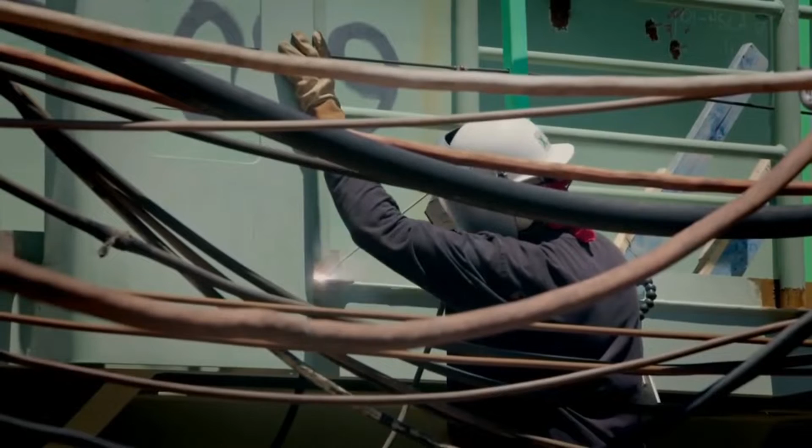In dry dock in Newport News, Virginia, Jeff Hummel and a team of engineers are building the second of this 10-strong fleet of carriers, the John F. Kennedy. We've been working on it for about 3 years. We got about another year and a half in the dry dock. And then after that, we'll spend about 2 years testing it before we deliver.

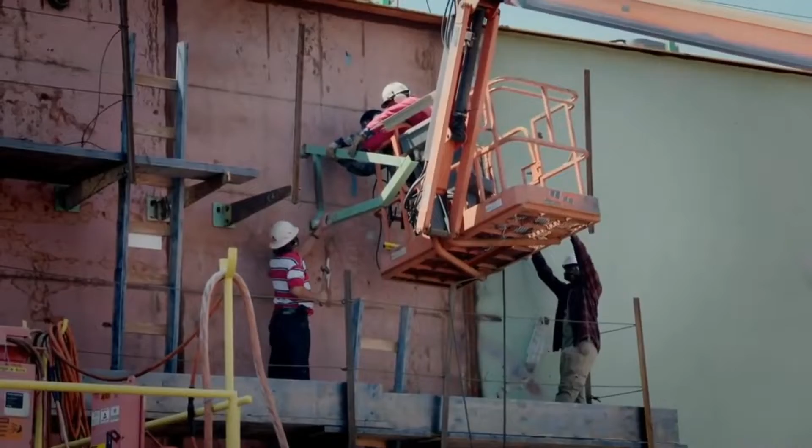Mike Butler heads up construction of these trailblazing ships. Well, an aircraft carrier has to satisfy two major roles. One is a humanitarian role, and one is a defensive or offensive military role. This ship does both and does it very well.

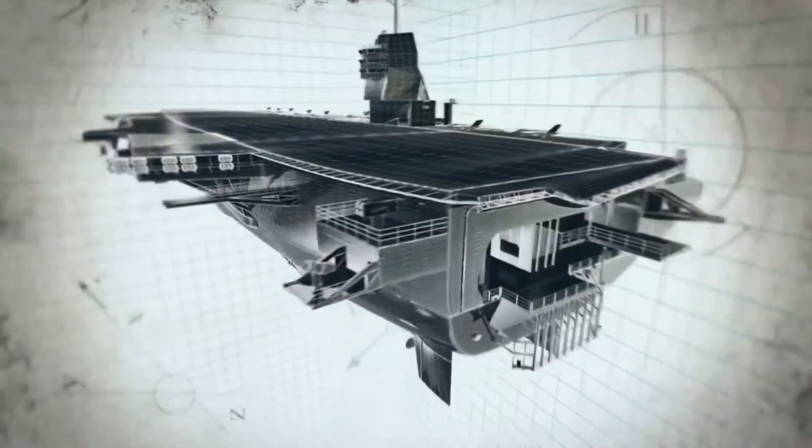The largest warship ever built, the Ford-class carrier is almost as long as the Empire State Building is tall. 35 aircraft are stored in a giant hangar. 3 supersized elevators deliver the planes to an 1,100-foot-long flight deck, equipped with an electromagnetic catapult system, capable of launching planes faster than ever before.

The amount of technology that's been infused into the ship is going to put the Navy in a position to fight the wars of the 21st century. It's going to be the most capable ship out there in the fleet.

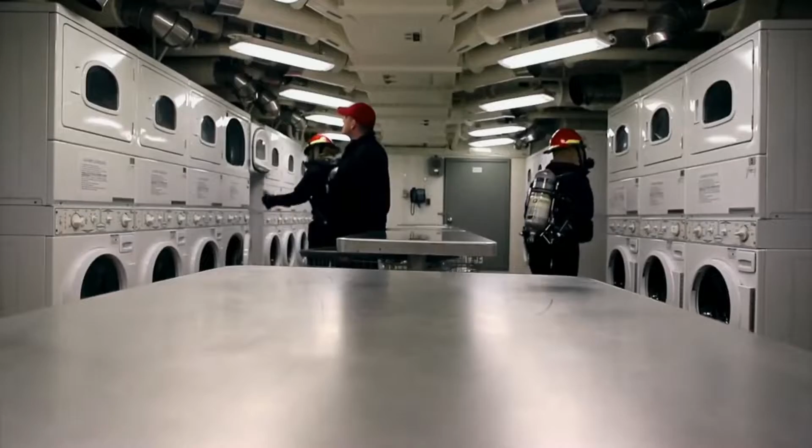But creating the world's largest mobile air base poses many challenges. How do you power a 110,000-ton vessel with 4,500 crew members? What we do is live everyday lives, so washing laundry, serving 20,000 meals a day, so it's like powering essentially a small city.

How is it possible to get jets airborne in just a fraction of a normal runway? The greatest challenge is to be able to get the aircraft to the speed that it needs in order to take off. And how can you bring them home safely? Landing on a carrier requires an external means of stopping the aircraft.

But the engineers face an even bigger problem. The Ford class holds more planes than any carrier before it. They must be able to launch and recover an astonishing 200 missions a day. So how do you achieve that on a ship?

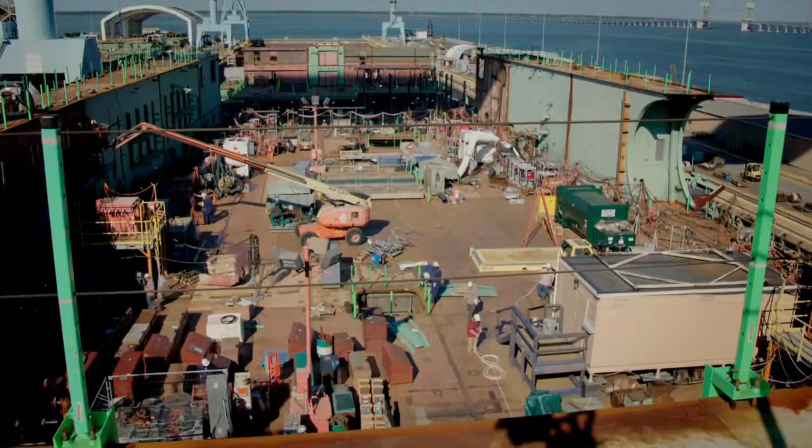Engineer Marco Estrada is facing that challenge. Typically, an aircraft carrier of the Ford class will hold approximately 78, 79 aircraft. The job of managing the flight deck is organized chaos. You have launches, you got recoveries, you got fueling, you got weapons at the same time. So it's a very challenging operation. To achieve their unprecedented mission rate, some aircraft must be able to land at the same time that others are taking off. It's an impossible problem that was faced by the innovators of the past.

U.S. Navy pilot Lieutenant Leslie Garcia is a fast jet specialist, well aware of the huge problems of launching and landing on an aircraft carrier. It is not uncommon to have over 20 aircraft launch right before 20 aircraft are recovering during the same open deck time.

To simulate the straight deck's limitations, Lieutenant Garcia is handing over the flying to a model plane club. So right now we're putting down the center line of the straight deck carrier.

The historic straight deck design is ready for takeoff, but how will it cope? They're going to go airborne, execute their mission, and then look to come in and land.

As the mission gathers pace, landing simultaneously is impossible. Now we've got the next cycle of pilots getting ready to take off, while the first cycle that we launched are still airborne and waiting for their opportunity to come land. So as you can see, they're basically fouling the whole flight deck. It's a very inefficient process.

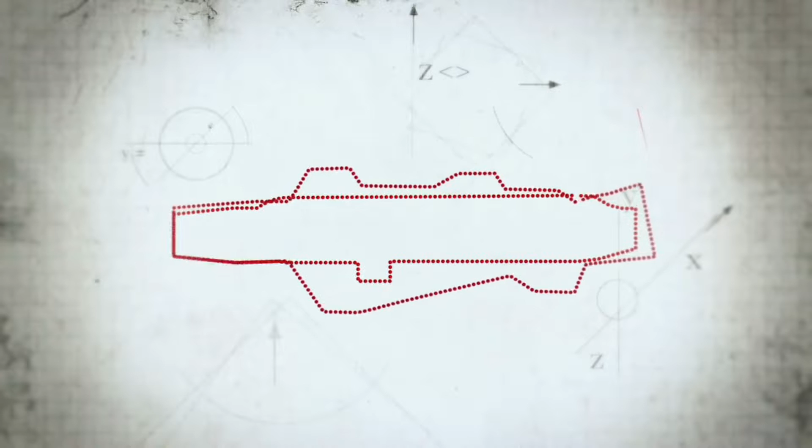It was the brainchild of British Royal Navy Captain Dennis Campbell and engineer Louis Boddington. They supplemented the traditional straight deck with a second runway. The plane's landing area was now separated at the ship's waist, while launch catapults were safely positioned at the front of the ship.

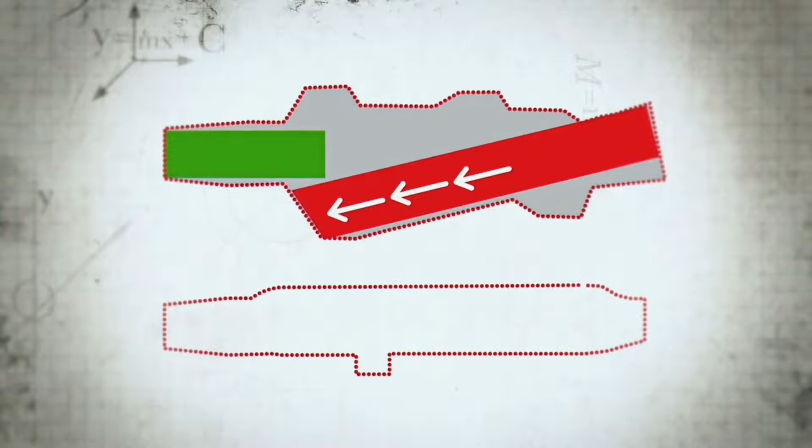When this was a straight deck, you would basically just see one landing area straight up and down the ship, with taxiing and launching aircraft towards the bow of the ship, landing aircraft towards the back. Really, the game was changed when we went over to the angled flight deck. It became so much more efficient and, more importantly, so much safer.

The Midway's remarkable refit allowed her planes to take off and land at the same time. The landing aircraft are going to be offset so that if they need to take back off, if they missed a wire, they will have the angled deck that is going to keep them away from the launching aircraft that are launching straight ahead.

So will adding an angled deck bring some order to today's mission? As you can see, we've got one taking off. He's going to come around and start executing touch and goes while we launch the other aircraft.

As on the Midway, Campbell and Boddington's addition transforms this airstrip into a well-oiled machine. He's approaching on his landing. Let's go ahead and launch the second. And you can see that those two flight paths are naturally deconflicted because of the angle that the landing aircraft is coming in on. We're basically getting two landing strips for the price of one.

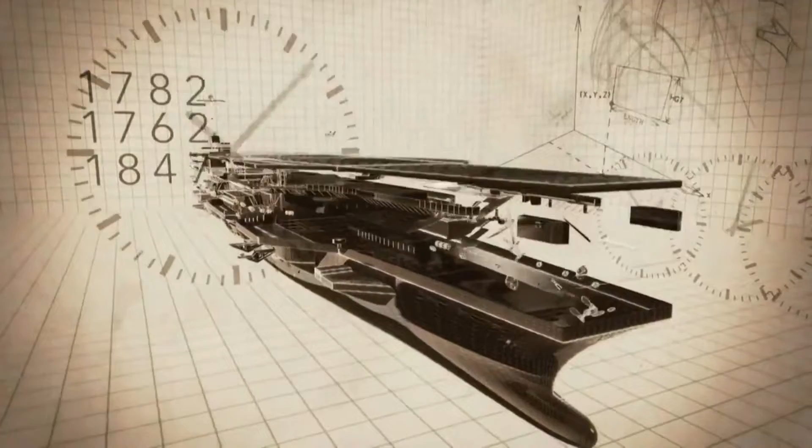The U.S. Navy's ultra-modern Ford class is also equipped with an angled deck. But whereas Midway launched just 89 sorties a day, the Ford class can complete over 200.

When you look at the flight deck as a whole, 4.5 acres seems large, but as you add 50 fighter aircraft and around 100 to 150 personnel at all times performing the various tasks, it gets very, very small very quickly. The ballet of us doing our job, they call controlled chaos, and that's really what it is.

400 yards. The Cambell and Boddington-inspired angled flight deck enables the Ford class to complete 33% more sorties a day than the U.S. Navy's previous carrier class.

The angled flight deck is a major feat in engineering in itself. With that angled flight deck, we have a living airport that is receiving aircraft at the same time it is launching aircraft simultaneously.

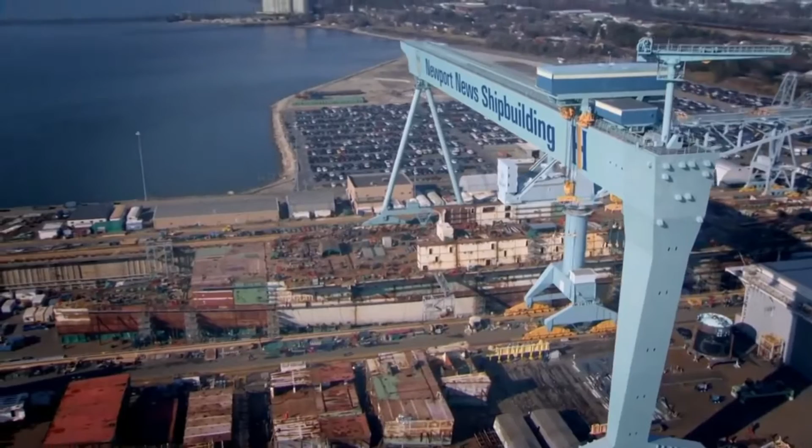With the second in class, the John F. Kennedy, under construction, it's up to engineer Marco to deliver the Ford class's next awesome angled deck. Currently, we are at the 01 level of the ship, so there's going to be a couple more levels going up where the flight deck is going to be. So currently, we're a little lower than the flight deck. But once the flight deck is installed, we should see the angled deck in this direction. The island structure should be in that direction. And that in itself is a major innovation.

So just how did moving the island in relation to the rest of the flight deck change aircraft carrier design forever?

The cutting-edge Ford-class aircraft carrier is a study in naval innovation and a dramatic improvement on flight deck efficiency and safety. It differs from its predecessors in a number of ways.

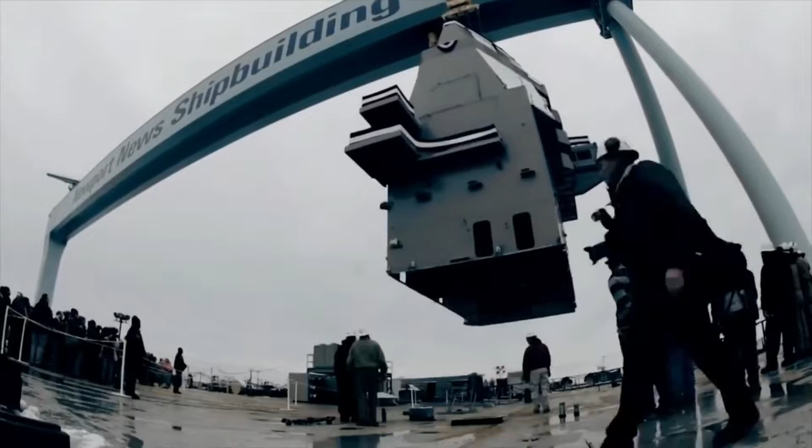For example, the position of the island is radically different from all previous designs of U.S. aircraft carriers. This is one of the keys to the class's extraordinary capacity to launch and recover aircraft at the same time. On the Ford class, the island structure was moved closer to the stern of the ship. That allows more parking of aircraft forward of the island structure, which allows Navy operators to turn around aircraft faster for fuel, service, and weapons loading, which in turn generates more sorties.

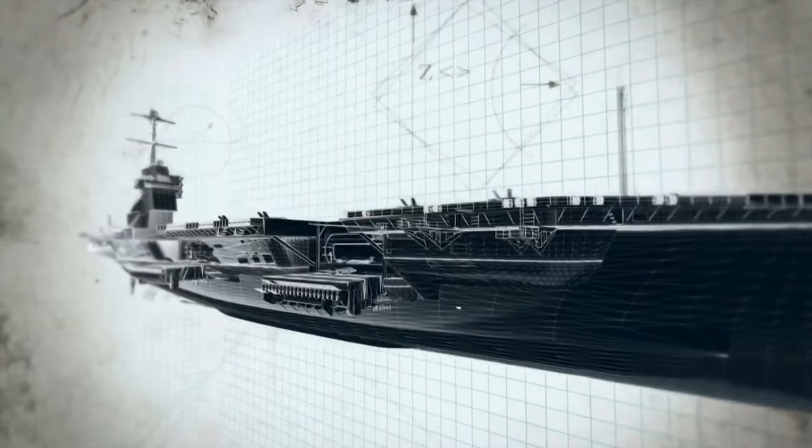At this point in time, this aircraft carrier design is the pinnacle of flight operations support for the U.S. Navy. The relocated island also has a smaller footprint than its predecessors, creating extra usable deck space.

Beneath the runways, aircraft are stored in a giant hangar, delivered to the flight deck by 82-foot-long electromechanical elevators. Positioned on the sides of the ship, any craft can be maneuvered without disrupting launch or recovery.

What you're looking at is what we call ACE-3, or aircraft elevator number 3, which is on the port side of the ship. The elevator is up right now, but looking at these slots, this is what actually slides our aircraft elevators down to the hangar bay and how we move our aircraft in and out for maintenance and operations, and then move it back up to the flight deck and taxi them off.

The Ford class is undoubtedly taking aircraft deployment to a whole new level. But the engineers faced another almighty problem: powering this giant carrier. And it is giant.

The aircraft carrier is a moving base. It is a moving city. So we have a mobile city, a mobile airstrip with all of the capabilities of any airfield, and it can be moved anywhere in the world.

As tall as a giant sequoia, longer than 60 New York cabs, and almost the width of an Airbus A380, it can hold up to 75 aircraft and accommodate 4,500 crew.

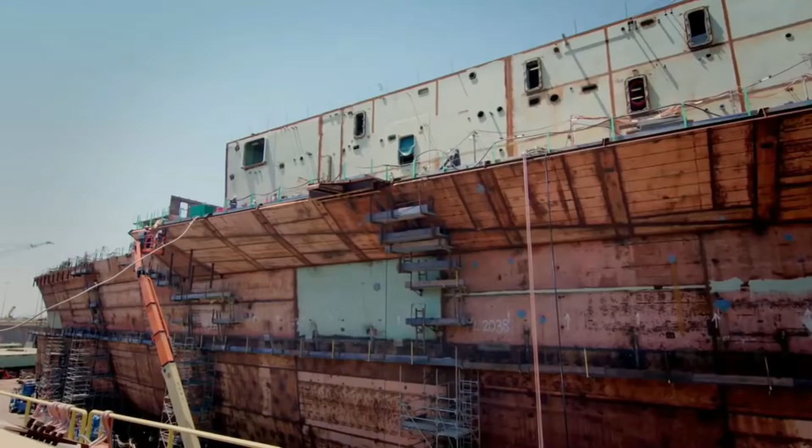In the dry dock, the second of this brand new class, the John F. Kennedy, is currently being assembled. Construction director Jeff Hummel is supervising part of the mammoth build.

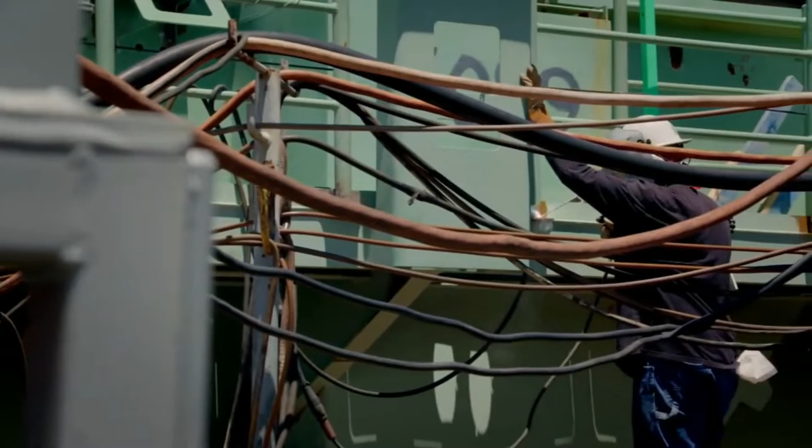When we're done building her, we'll deliver a ship of a little over 80,000 tons of displacement. When the Navy actually loads it up with crew, planes, and supplies, it'll be close to 100,000 tons going to sea. It will take more than 3.9 million pounds of welded metal to complete this ship.

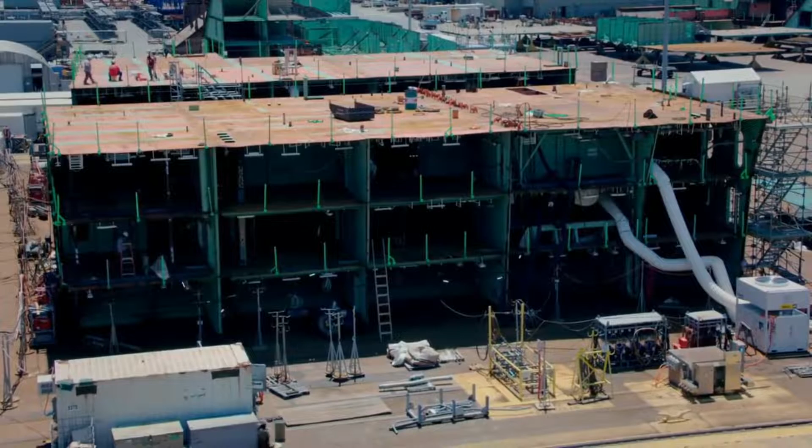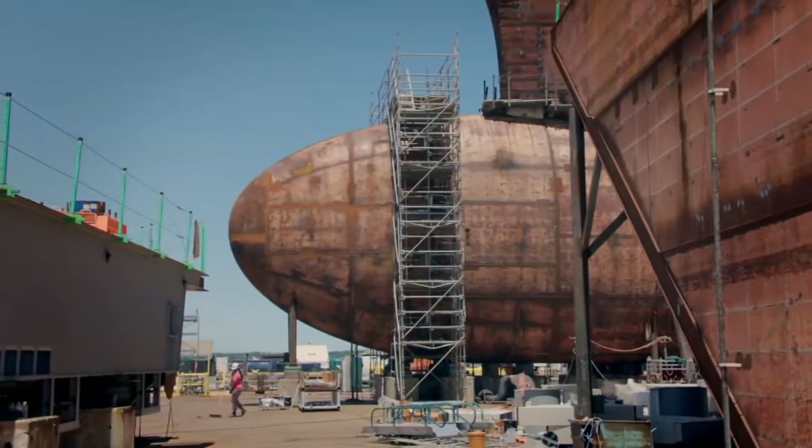Construction on this scale creates huge logistical challenges. The solution is to build the Kennedy in a series of massive sections known as superlifts. Right behind us is what we call the lower bow superlift. It's about 60 feet tall and a little over 100 feet long.

It's made up of 7 units that were built in our steel shops, brought over here, and joined into one giant superlift. Just aft of it is the beginning of what we call the upper bow. You can see the leading edge of the flight deck there with that rolled shape. That's actually going to be the very bow of the ship.

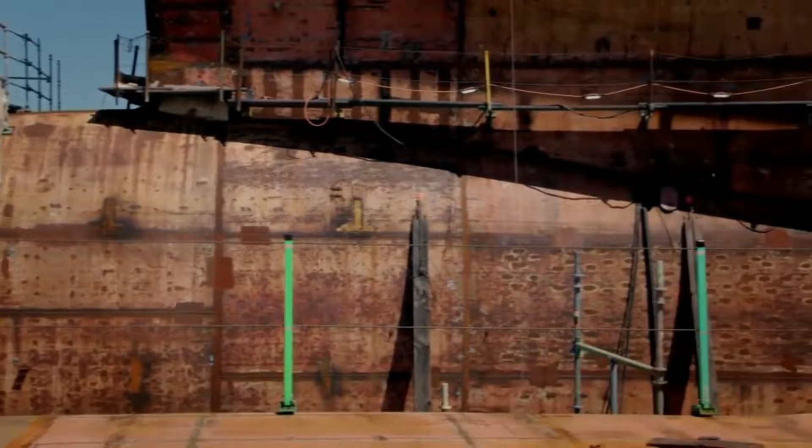These megastructures are only possible because of a staggering piece of engineering: one of the largest cranes in the world. Behind me here is what we call our 1,050-ton crane. Other people affectionately know it as Big Blue. This crane is rated for 1,050 metric tons.

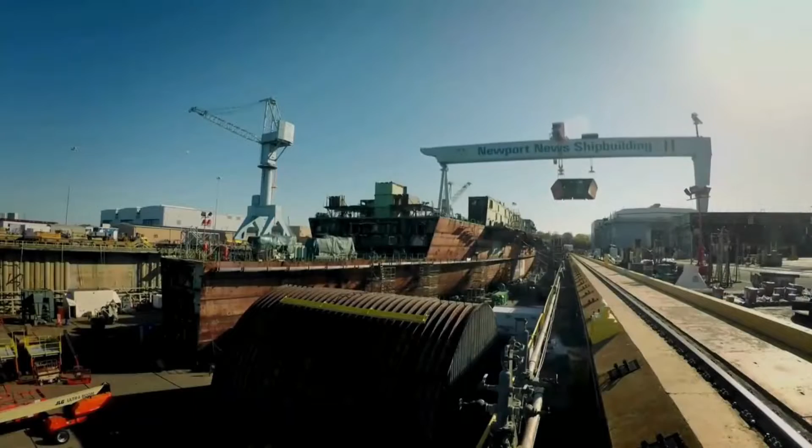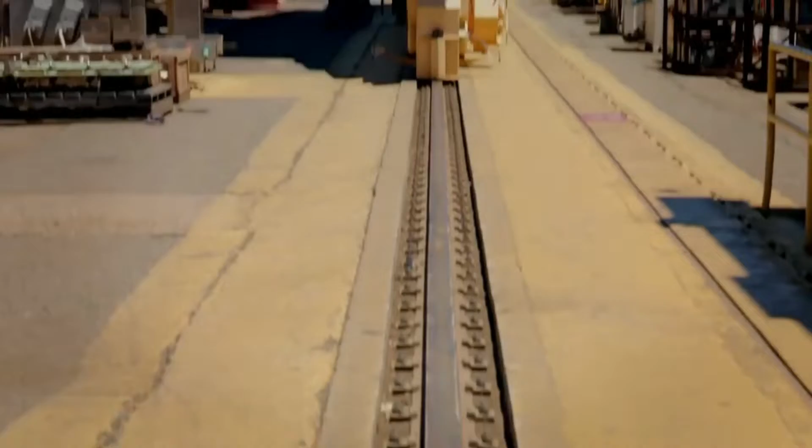It's a very capable crane. It has 2 rails running what we call east and west, towards and away from the river. It spans about 540 feet between the rails, and it's about 230 feet tall.

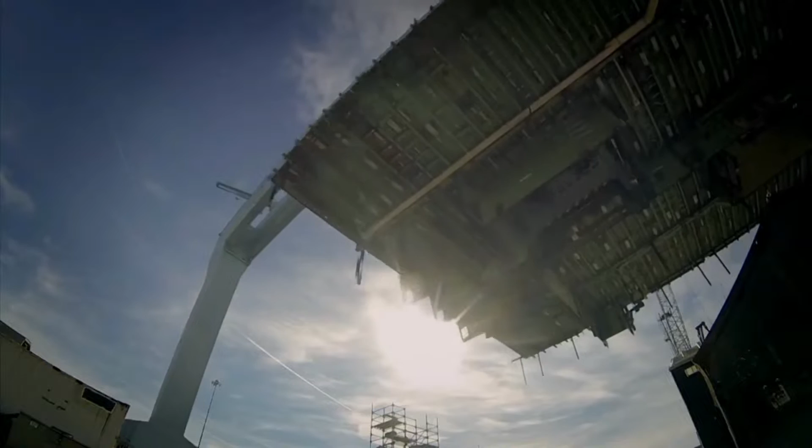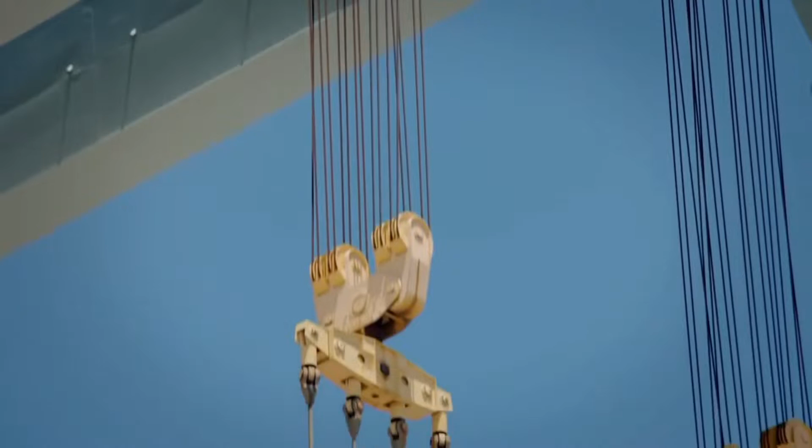When you're maneuvering 1,000-ton steel sections, there's no room for error. Big Blue's 3 hoists allow pinpoint precision. With this crane, you're actually making one move with all 3 hoists synchronized. It's got pretty good precision as far as how accurately we can place or move the unit, getting it within an inch or less. Then we can use some jacks to position the unit exactly where we want it. It's just cool, man.

But once at sea, the Ford class's sheer scale poses another enormous problem. As their missions will last for months at a time, propelling a ship of this size with traditional thirsty combustion engines is out of the question. Not only that, the power needs to satisfy the demands of over 4,500 crew.

A new power source is needed. Can the innovators of the past shed any light on the problem?

Cartagena in southeast Spain could harbor a solution for the Ford class. Former Spanish submariner Diego Quevedo is visiting the historic naval base of a nation that once ruled the waves. This was the very navy that carried famous explorers across the Atlantic to discover the New World. By the 1800s, the might of the Spanish Navy may have faded away, but in 1888, a new breed of maritime engineering surfaced.

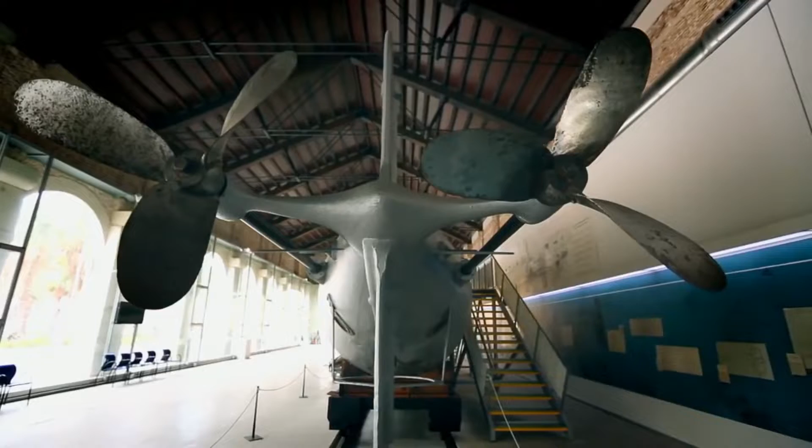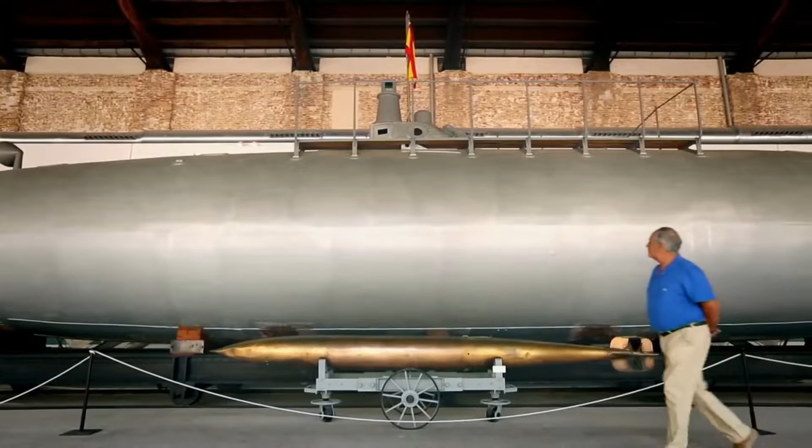This is the Peral submarine, the world's first fully functioning military submersible. The 72-foot-long Peral changed the face of warfare. This was the first submarine that made navigation absolutely submerged, sailing at 10 meters deep. That's incredible.

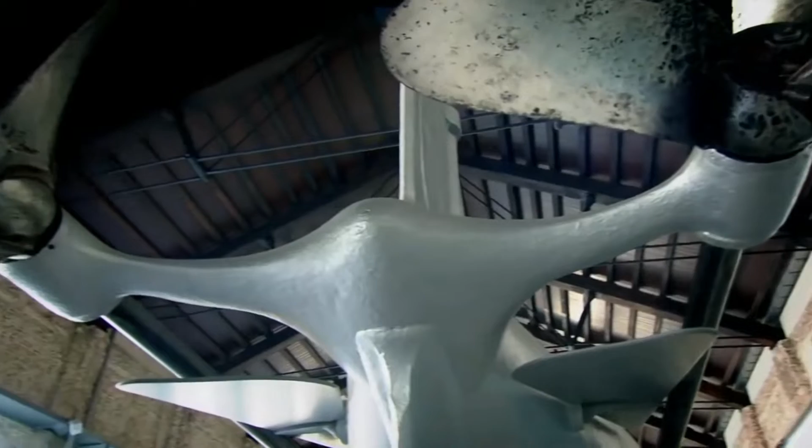But the Spanish engineers had the same problem as the one facing the Ford class: how to power the Peral on long missions through the world's oceans. Propelling the submarine was very difficult. It was a big problem. The obvious choice was to use a combustion engine.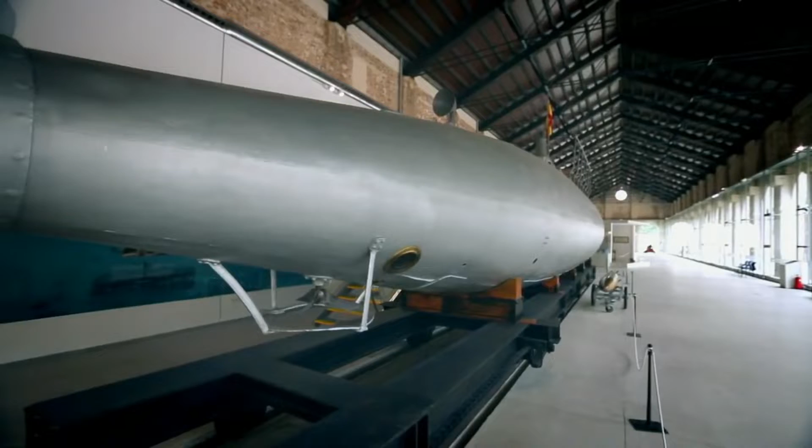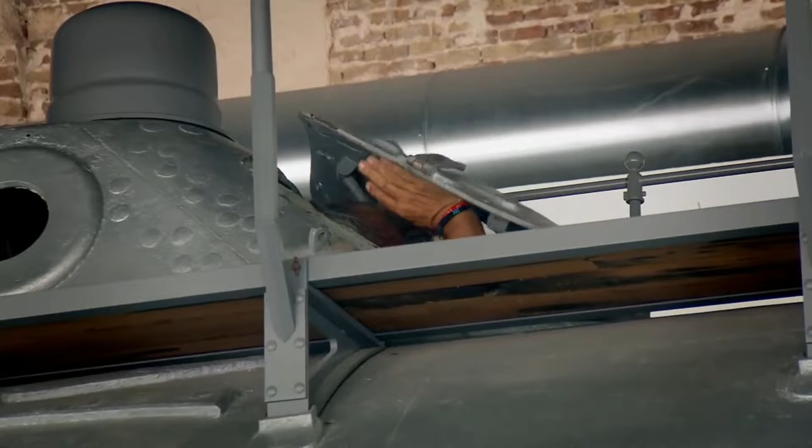However, a combustion engine's toxic fumes would be deadly in this airtight steel tube. The air is necessary for sailors. Engineers need a solution to this problem. So how did the Spanish Navy power the Peral? And how can the answer help to drive the greatest warship ever built?

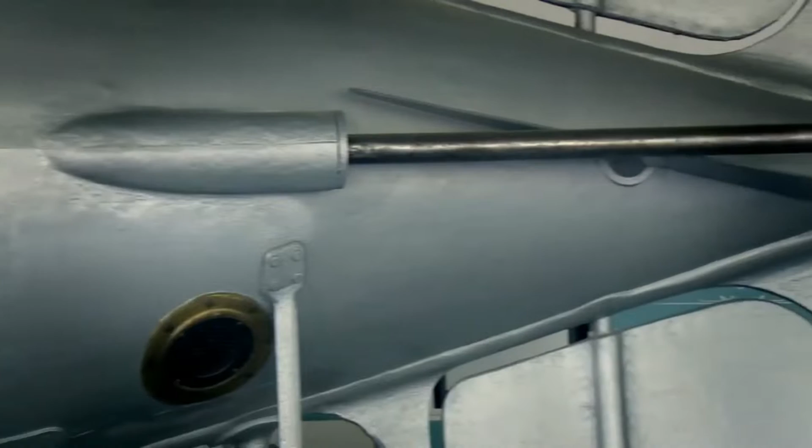The Peral submarine was the first submersible vessel of its kind in history, and the Spanish Navy needed a way to power it without the toxic fumes of a traditional combustion engine. The submarine's designer, naval engineer Isaac Peral, had an ingenious answer. To create sustainable power beneath the waves, he turned to electricity.

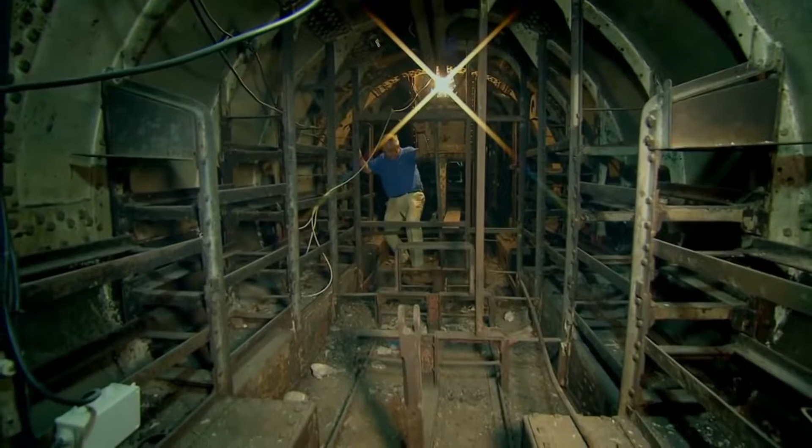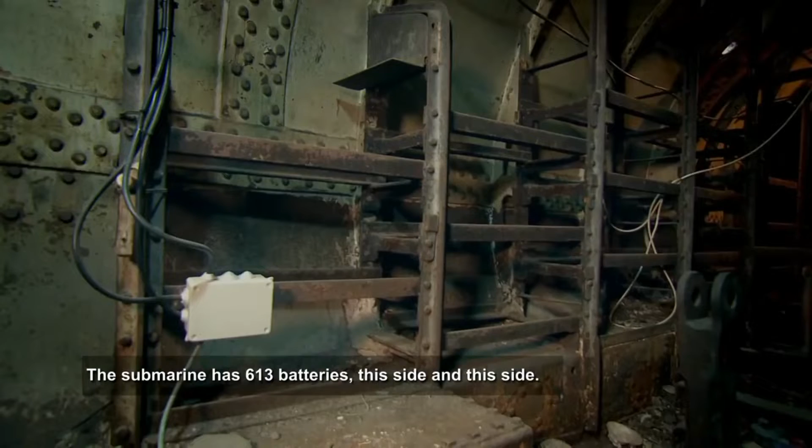And today, Diego Quevedo has special access to the heart of the solution. The submarine has 613 batteries, this side and this side. Each one is this size, okay? The Peral was lined with 33 tons worth of rechargeable lead-acid batteries. Their first job, to propel its sleek structure through the depths.

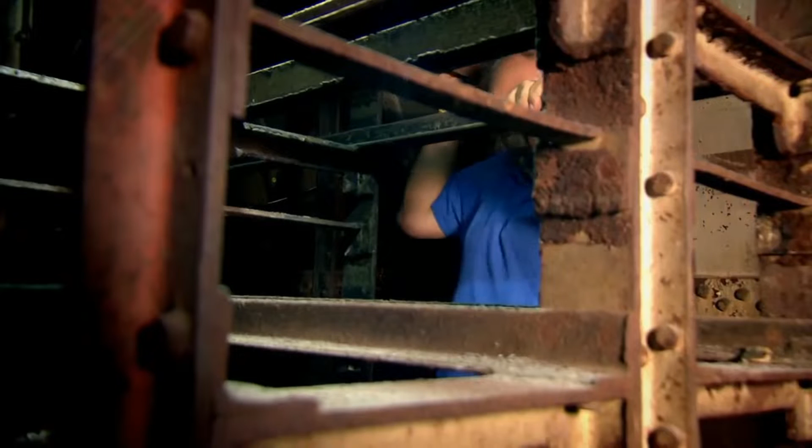Here, this side and this side, the two electric motors, and this one and this one, the two propellers. Of the 613 batteries, 400 of them were only for the motors. Virtually every system on board was also battery-powered, making this the world's first truly self-sufficient sub, cementing Peral's contribution to marine power.

Peral was not a normal engineer, an excellent engineer, on top of the engineers.

The Peral's batteries allowed it to cruise underwater for a few hours, with a range of 132 nautical miles. But the Ford-class's power source can keep it at sea for months at a time, without refueling.

Building on modern submarine technology, the solution is a pair of state-of-the-art nuclear reactors. One of the major advantages to having nuclear power is the engineering feat of actually getting 100,000 tons of displacement with the aircraft carrier through the water at about 35 plus knots. We are able to have 4.5 acres of sovereign American soil anywhere in the world for up to 25 years at a time under nuclear power.

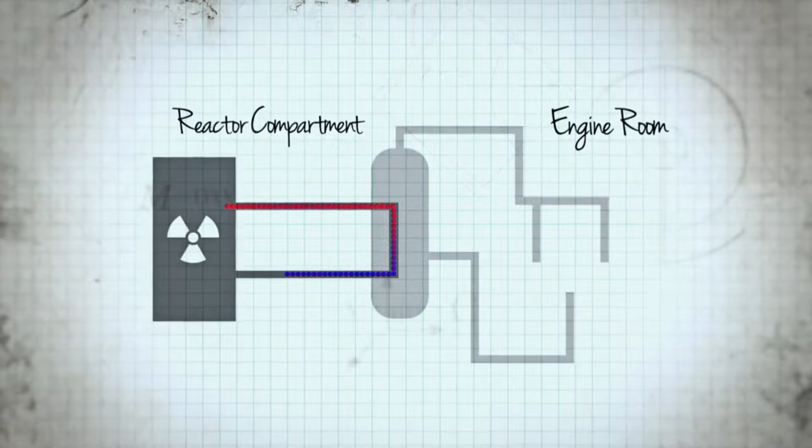The nuclear reactors split uranium, producing heat which converts water to steam, powering 4 turbines. These rotate 4 propeller shafts to drive the 1,100-foot-long carrier.

And over 9.8 million feet of electrical cabling also provide energy for the 4,500 crew on board. The USS Gerald R. Ford is a floating city, so we have every service that a civilian counterpart or an actual township that you might live in might have. We have a post office, we have gyms, we have a coffee shop, we have laundry service. We have that on board so that we can sustain ourselves out for long periods of time and really be effective.

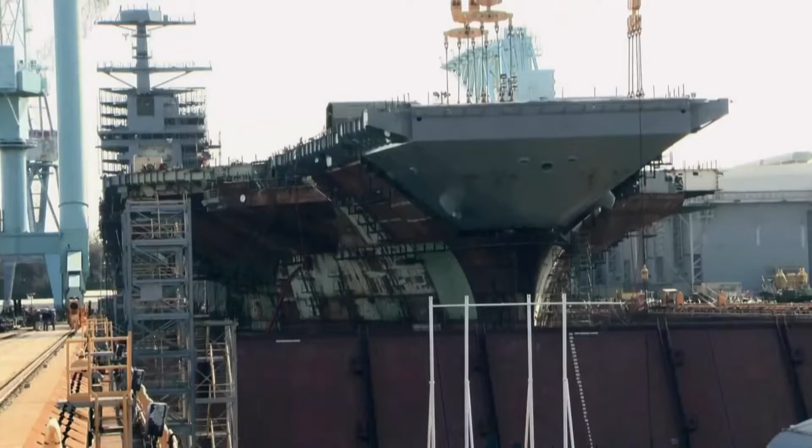But the civilian services are not the ship's main attraction. It is, after all, a warship.

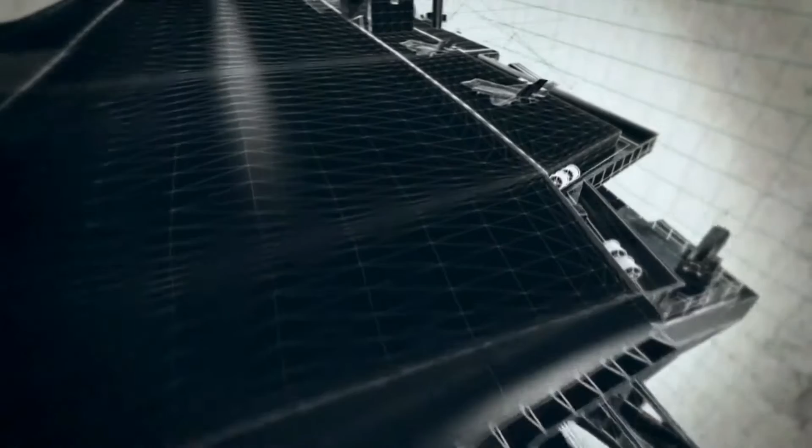This brand new carrier class has 17 decks. Its colossal flight deck stretches to 5 acres. It boasts supersized engineering designed to deploy more aircraft missions than ever before in any part of the world.

The first of this game-changing fleet has only recently been commissioned into the U.S. Navy. USS Gerald R. Ford is setting the standard and it's setting the bar on the way that aircraft carriers around the world and the way naval operations are going to be dealt with and sustained.

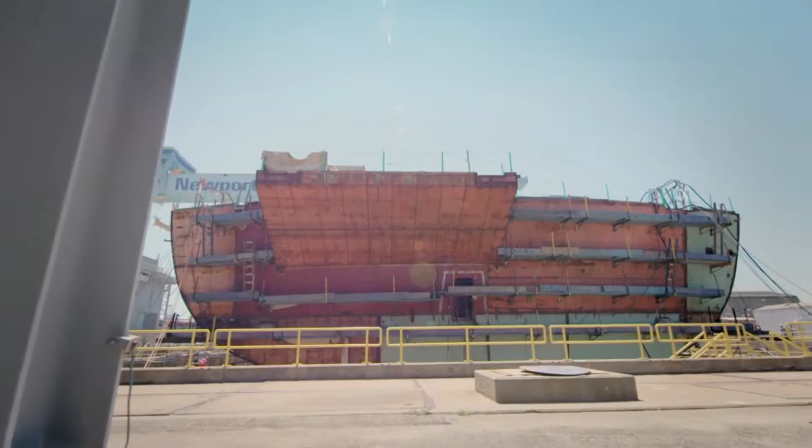10 record-breaking carriers will eventually make up the Ford class. The second of which, the John F. Kennedy, is currently being assembled. When completed, it will be well over 950 feet long. But its runway will only be around 1/7 of a normal runway's length.

Launching aircraft in this distance poses a huge problem for engineer Gabe Sava. The runway on this carrier is going to be just under 350 feet. So the greatest challenge involved in launching an aircraft from a carrier is that you only have a fraction of the runway that an aircraft typically would need in order to take off.

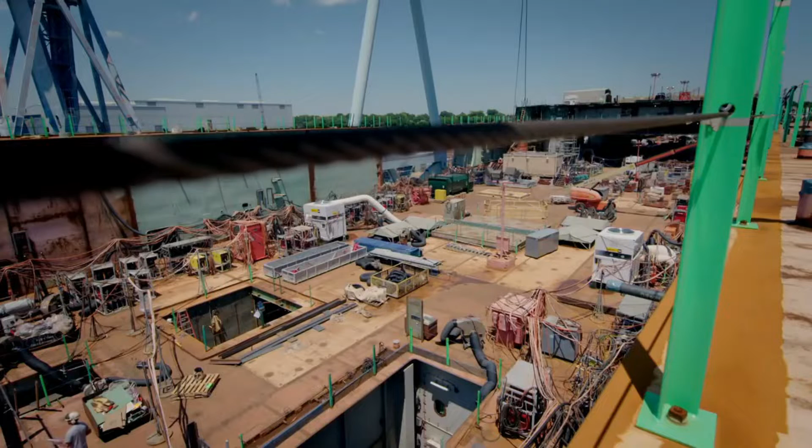To get the aircraft to the adequate speed, we have to use a system of launching, which is a catapult system that propels and accelerates the aircraft so that it can take off.

To date, launch catapults have been steam-driven. But these systems lack acceleration control and would rip apart the Ford-class's lighter aircraft, such as unmanned drones.

Steam-powered catapults, by their very nature, can put a lot of loads or stress on the aircraft. In addition, steam catapults require a lot of maintenance. There's a lot of corrosion within the troughs because there's a lot of moisture.

Engineers needed a way to get aircraft up to speed while also protecting their structural integrity and that of the launching apparatus. To do so, they would have to turn to the innovators of the past.

On the U.S. Navy's most advanced warship ever, traditional ship-to-air launch techniques weren't going to cut it. The team behind this monster vessel needed a way to get aircraft up to launch speed with about 1/7 of the traditional runway.

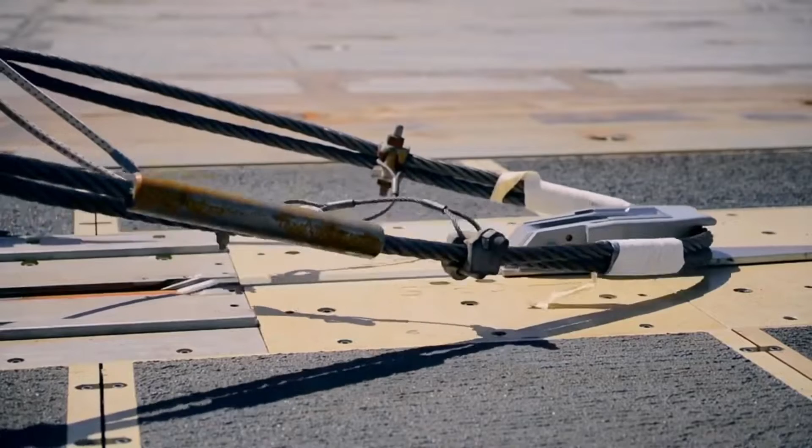Concealed below the catapult's shuttle and rails, the electromagnetic aircraft launch system, known as EMALS, uses the ship's power to create an enormous electrical charge.

The system uses 13,800 volts that's being generated from the ship in order to power the equipment. And with that energy, we're able to launch an aircraft 0 to about 150 miles per hour in just under 3 seconds.

With the plane on 100% throttle, this huge shot of electricity is released into a series of electromagnets positioned down 2 launch rails. A powerful magnetic wave propels the attached plane off the runway.

With EMALS, the power that we produce during each aircraft launch is a lot more controlled. So for that reason, we can be able to launch a wider range of aircraft.

Using computer software, while the catapult is going down the track, it knows how much power is needed in order to get that aircraft off the deck.

But sometimes even the mighty EMALS catapult isn't enough to get the jets off the deck. Chief Petty Officer Jeremy Steckline has experienced this potentially dangerous situation firsthand.

There are times that we're out in the middle of the ocean, depending on weather, depending on what the aircraft needs to be loaded down with. Sometimes that aircraft doesn't have enough power on 100% throttle to reach that minimum airspeed, and sometimes we need just a little bit extra. For the engineers, this is a problem that could end in disaster.

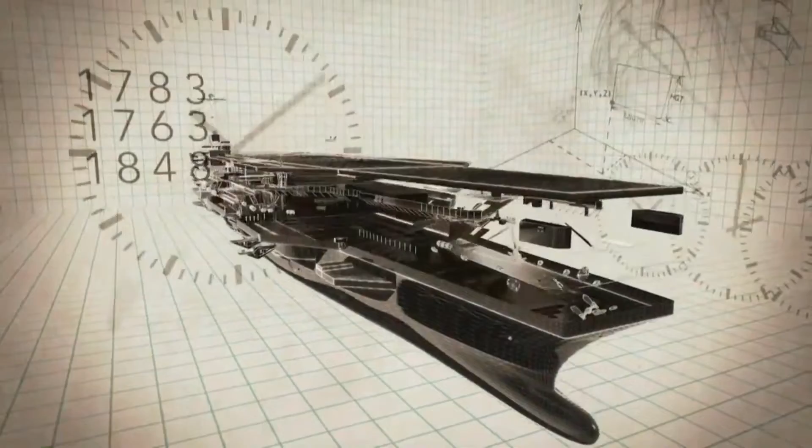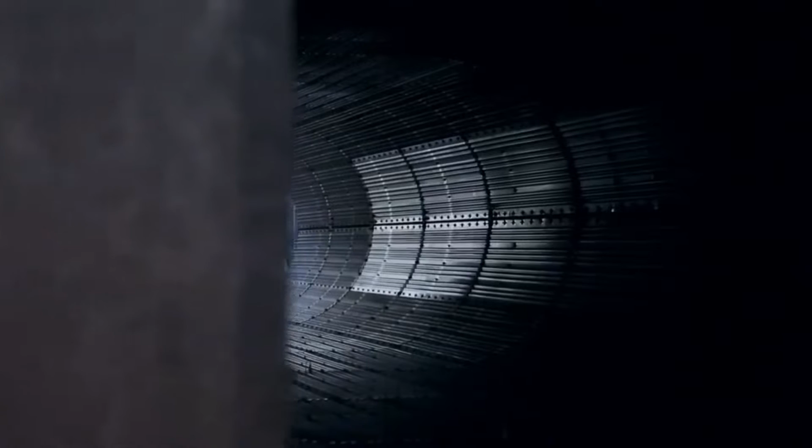Engineer Dan Dickrell is at the Patuxent River Naval Air Base in Maryland, the site of an extraordinary innovation that could provide a solution for the Ford class.

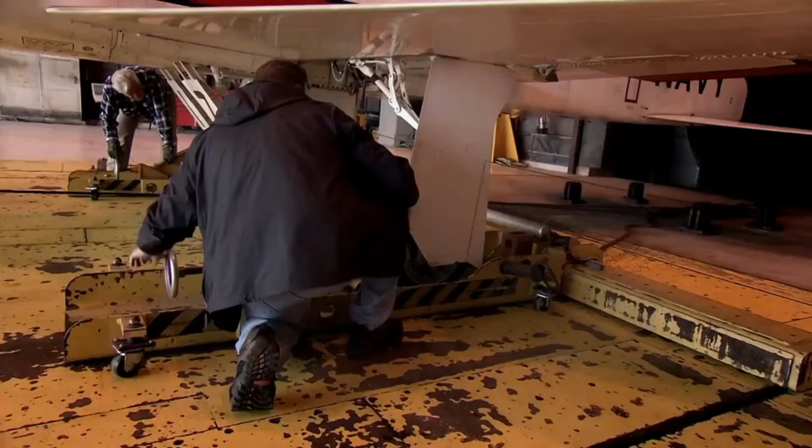Today, the T-38 is entering the Hush House, a secretive test facility where engineers can see how jet engines perform up close. All right, so the T-38's tied down. The test is about to begin. Let's do it.

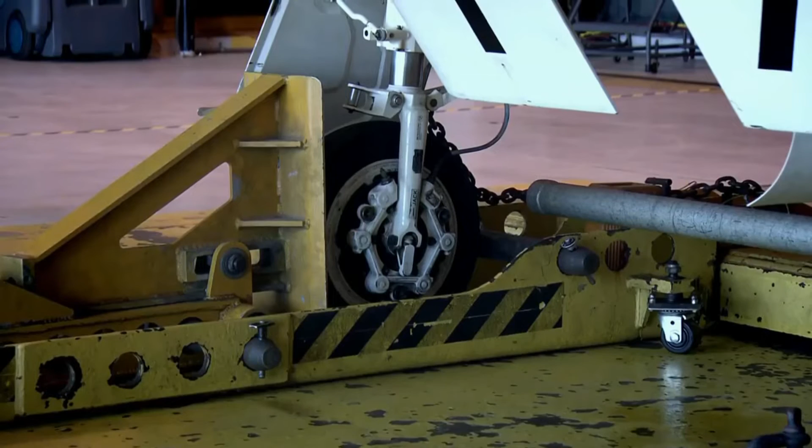With special clearance just feet from the engine, Dan is witnessing a test that will reveal one of the keys to a successful aircraft carrier launch. Here we go, test is beginning. Pretty excited, you can hear it spooling up. When it goes on, we'll know. Here we go.

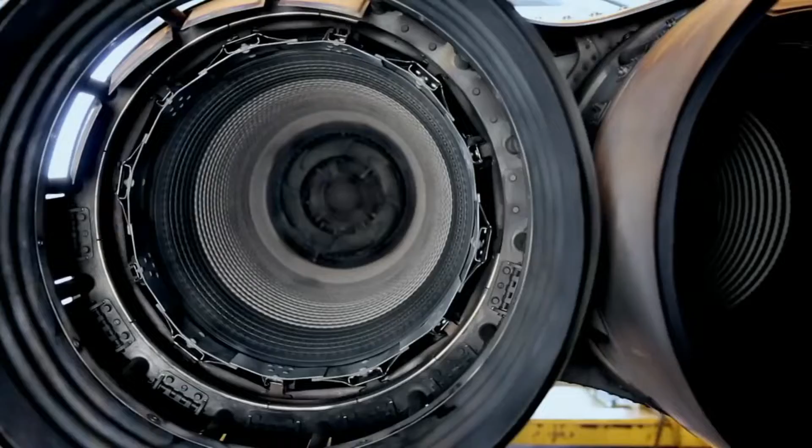This incredible sight is created by what's known as an afterburner. It's the secret to producing the thrust required by the Ford-class's jets. It was invented over 85 years ago by Sir Frank Whittle, one of the forefathers of the aircraft engine.

A Meteor jet plane is ready for an unofficial approach to the sound barrier. During the 1940s, the race was on not only to break the sound barrier, but also to reach 1,000 miles per hour. Jet engines needed more power, but making them bigger was out of the question. So Whittle devised his radical solution, the afterburner.

See, it's right here in the back of the engine. It vastly increases the amount of thrust available to the engine without adding much weight or complexity to the engine itself. With minimal adjustments, Whittle figured out how to dramatically outperform the standard jet engine, and his ingenious modification holds the key to getting aircraft from the deck of a Ford-class aircraft carrier to the skies.

When engineers behind the Ford-class aircraft carrier needed to get aircraft from deck to air using about 1/7 of the runway space, the answer was thrust. And they turned to Sir Frank Whittle's historic innovation to provide it.

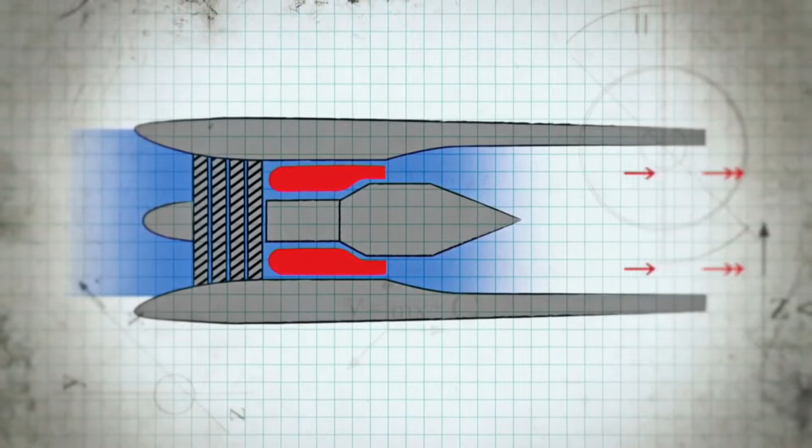A standard jet engine takes air in, adds fuel, and ignites the mixture, propelling the aircraft forward. Whittle realized much of the oxygen was unused, so he added more fuel at the rear of the engine to utilize it. This creates a massive amount of extra thrust.

When you're designing something, the simpler is usually the better. And Whittle's solution is amazingly simple, yet its performance increase is brilliant.

To fully appreciate the afterburn experience, an Air Force veteran, Bud Green, is reacquainting himself with the F-100, the first U.S. jet to fly supersonic. 0 to 62 miles an hour takes just seconds. At top speed, it smashes through the sound barrier.

Man, it's been a long time. Holy moly. Courtesy of a staggering piece of engineering. Very nice, thank you, sir. Wow, I felt that one.

We were going about 320 or something like that when he lit it, and you could really feel the kick. All of a sudden you've got a whole bunch of additional thrust, and it just knocks you in the rear end. It was fun, it was really a kick. Unbelievable.

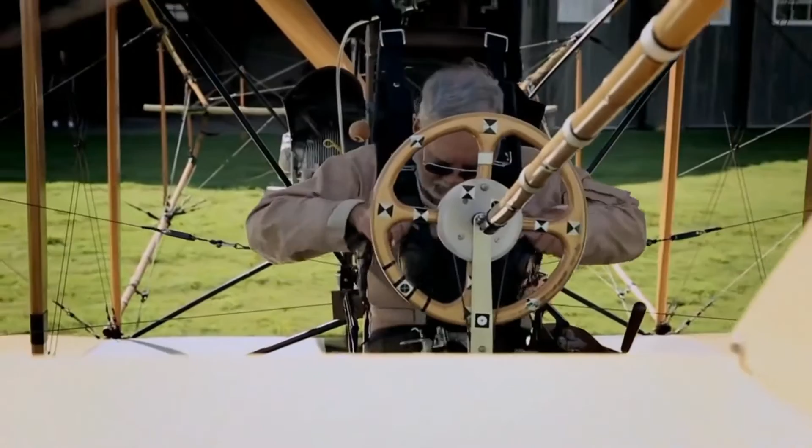It may be hard to believe, but this beautiful biplane could hold the key to landing on the Ford-class carriers. Engineer Dan Dickrell is in Virginia, discovering how.

That marvelous airplane that just took off is the Ely Curtiss Pusher. Even though that's a replica, it was built in 1910 and first flew in 1911. The Curtiss Pusher is unique because it was the first plane to take off from a warship.

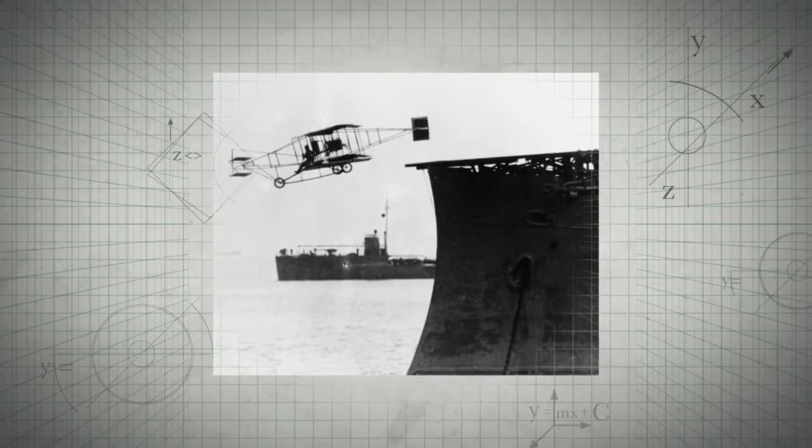But American pilot Eugene Ely wasn't satisfied. He also wanted to land his plane on a ship. However, he only had 120 feet to work with.

A problem demonstrated as today's flight draws to a close. So the biplane's landed. It first touched down right about here and has coasted to a stop. I'm gonna pace it off and see how far it took to come to a complete stop. If this plane was landing on Ely's ship, anything over 120 feet would have ended in disaster.

All right, here. Hey, how's it going? How you doing? Terrific. How much was it?

It was 275 feet. It would have smacked probably right into the superstructure of the ship in that case, or over the side if it wasn't the superstructure.

But Ely had the help of engineer Hugh Robinson, who came up with an idea to bring his aircraft safely to a halt. It's a solution that could help the Ford class.

Robinson came up with arresting gear. This was a system that was designed to bring the plane to a stop. It was little more than rope and sandbags.

Robinson tied the rope between the sandbags across the ship's deck. The plan was to transfer the landing plane's momentum into the heavy bags by adding a tailhook that would snag the rope as the plane passed over it.

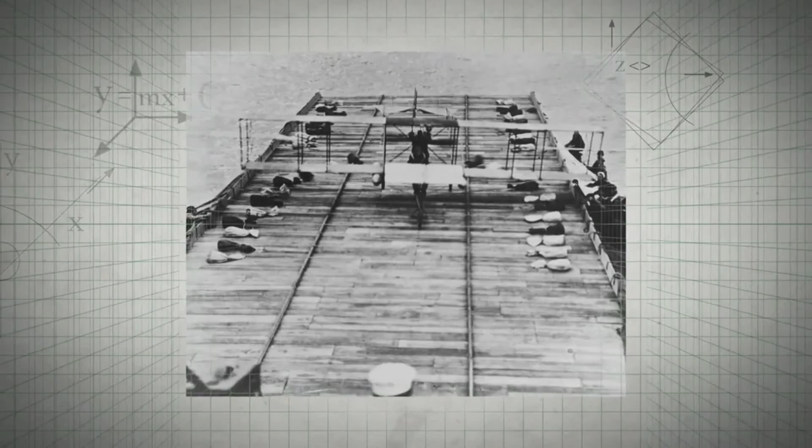That particular innovation was the example that landing aircraft on ships was possible. It really paved the way for what we see today.

Now, the Ford class's engineers are adapting Robinson's ingenious concept. But at 65 times heavier and 4 times faster, their jets will require more than rope and sandbags.

The team behind the Ford class will have to supersize the innovative concept of arresting gear to bring the carrier's Navy aircraft safely back down to Earth.

With little deck space to land on, the engineers designing the Ford-class aircraft carrier needed a way to stop descending aircraft in their tracks. The solution is a cutting-edge system known as advanced arresting gear.

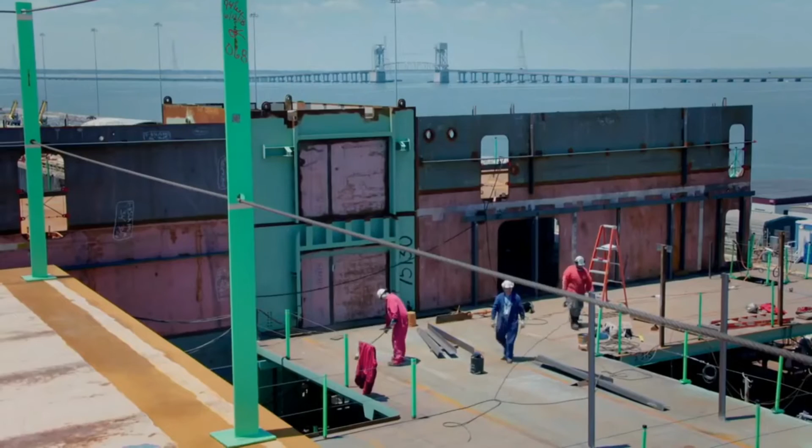The current advanced arresting gear system on the Ford can arrest aircraft up to 50,000 pounds. In order to do this, it has to have precise controls so that you don't overstress the aircraft. As the aircraft approaches, it picks up the pendant off the deck.

The cable tension then goes through a cable shock absorber. The shock absorber takes out the wave in the cable. It's kind of like car shocks.

Then the braking power is provided by a water twister. Situated below deck, the water twister is a paddle wheel submerged in fluid. Its rotation provides frictional resistance, absorbing around two-thirds of the landing's energy.

The remainder of the arrestment is controlled precisely by a motor generator that takes that kinetic energy and turns it into electrical energy that is then stored for later uses on AAG.

The advanced arresting gear is also incredibly adaptable. During a 2-second landing, computer controls continually adjust the gear according to the aircraft's weight. In other words, I can arrest lighter aircraft than I would have been able to with my old system, or heavier aircraft, because I have the ability to actively control the arrestment.

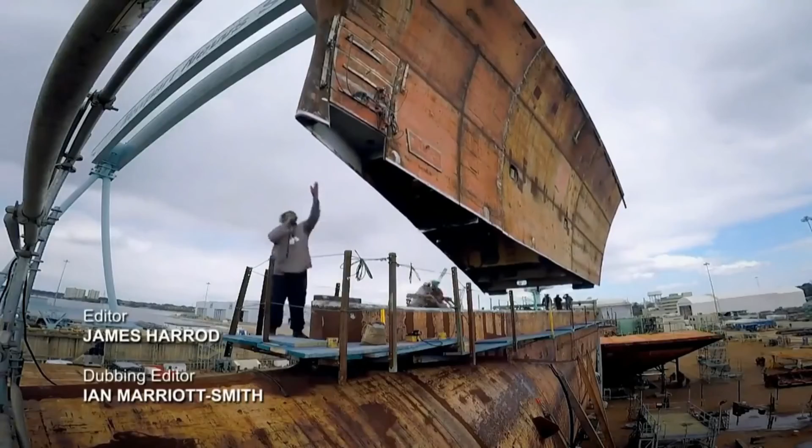By building on the work of the pioneers of the past, upscaling and making their own discoveries, the engineers are succeeding in making the impossible possible. Where we go from here, really the sky is the limit, and I think USS Gerald R. Ford shows that impossible engineering is not so impossible.